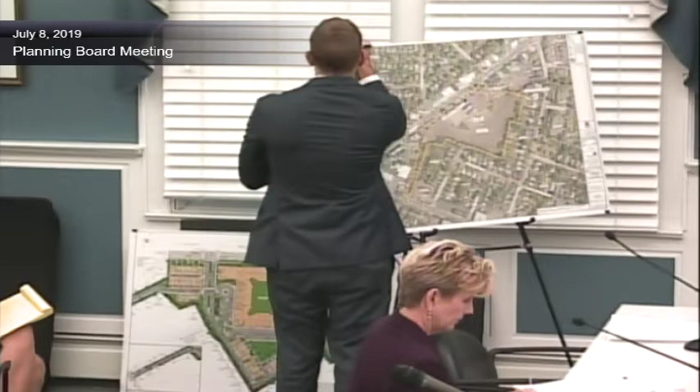Okay, so what I'd like to do for the record, mark this first exhibit A1. It is a plan titled Aerial Exhibit. It's been prepared by my office with today's date of July 8, 2019.

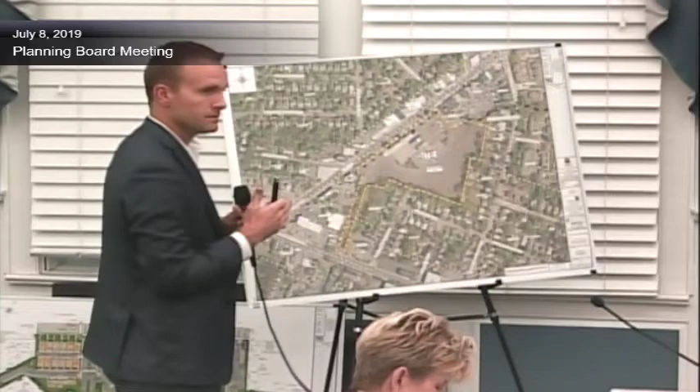Before I get into the proposed site improvements, I want to quickly familiarize the board with the subject site for our application. For the board's reference, the top of this exhibit is to the north. The subject site for our application is delineated with a thick yellow dashed line, part of the redevelopment plan centered on this exhibit.

Mr. Carter, maybe you could turn it to the public so they can also see it? Yeah, it's also on the TV. Can we turn the TV a little bit? No? Okay, just turn the exhibit. I don't know if any of the board can see it. Good, because I think the board should see this. We'll be okay, we have it in front of us.

So with regard to the overall site, it's about 9.7 acres. As you heard from Attorney Price, the first 20-foot strip is actually located in the township of Millburn along the Millburn Avenue frontage. The subject site to the north has frontage along Millburn Avenue, which as you heard is under Essex County jurisdiction as County Route 527. Immediately beyond that are various retail commercial uses that lie within the township of Millburn.

Working in a clockwise direction from that point, one specific area I want to call attention to, and I'll talk more about it in the proposed condition, is that the northeast corner of the site is Van Winkle's Brook, an NJDEP regulated watercourse. Currently, impacted by the existing site conditions, you have asphalt parking areas from the prior use that encroach within that riparian corridor of the stream. So when I get into the proposed conditions, you'll see one of our redevelopment goals is restoration to that riparian corridor, pulling back that impervious cover that's almost right to the top of those stream banks.

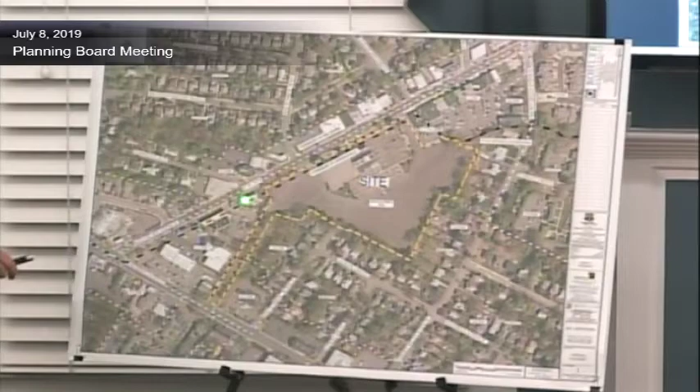Santander Bank is located along the western portion of our frontage. If we focus in on the existing site a little bit more, I indicated it was 9.7 acres, former home to the Saks Fifth Avenue department store.

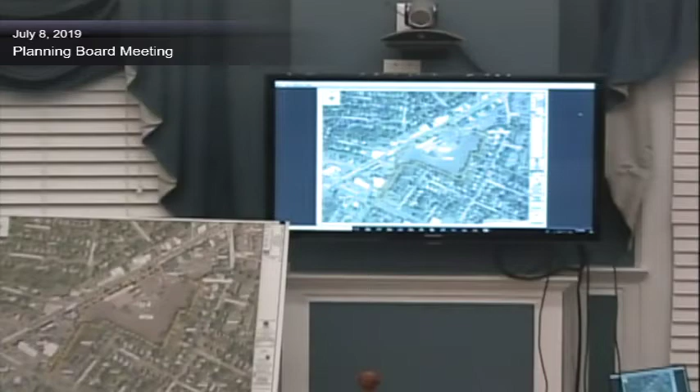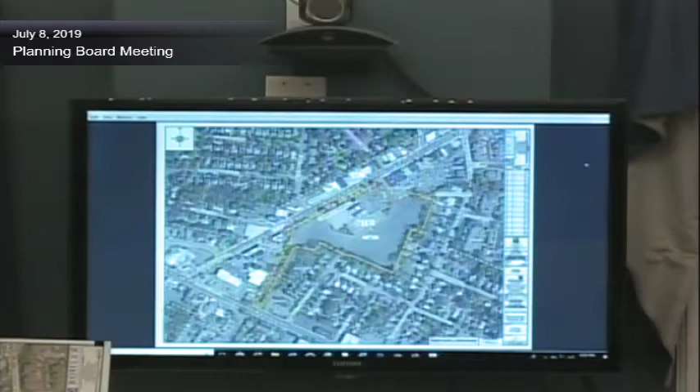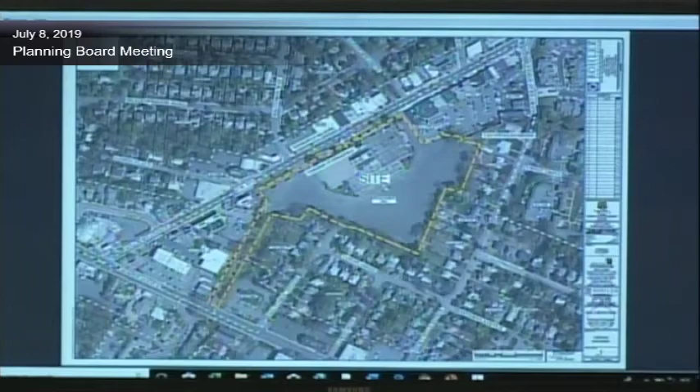That building is located about 28 feet from the Millburn Avenue right-of-way. Factoring in the first 20 feet that are in Millburn, it's roughly 8 feet into the Township of Springfield area. That structure itself is about 83,000 square feet. Rough height of that building is 20 feet, but as several board members may know, some of the central portions of that building actually extend a lot higher, getting all the way up to about 41 feet.

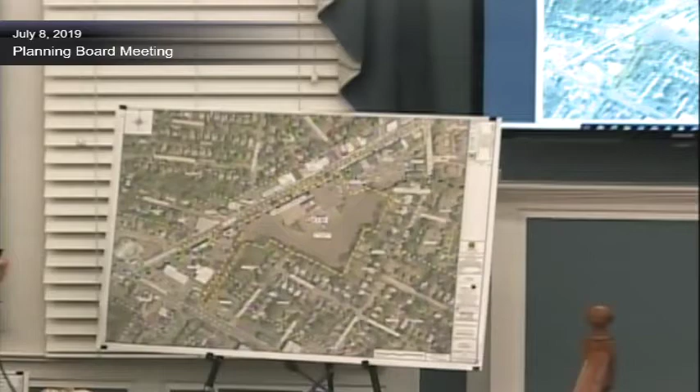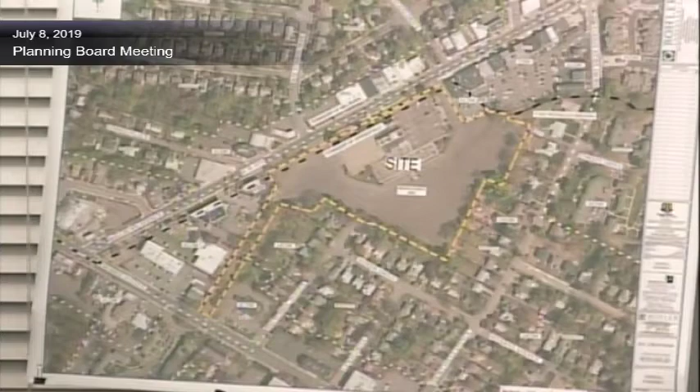One thing that the aerial accurately presents is the expansive impervious coverage on this site. Behind that existing building there are expansive asphalt parking fields, on the order of 84% of the overall site being impervious coverage. As I get into the proposed conditions, you'll see one of the improvements to the site is a significant reduction in impervious coverage, added green space, added landscaping, and amplified landscaping buffers to the residential properties to the south and east. Under current conditions, some of those parking fields actually get as close as 1 to 2 feet from that shared property line to some of those rear residential uses.

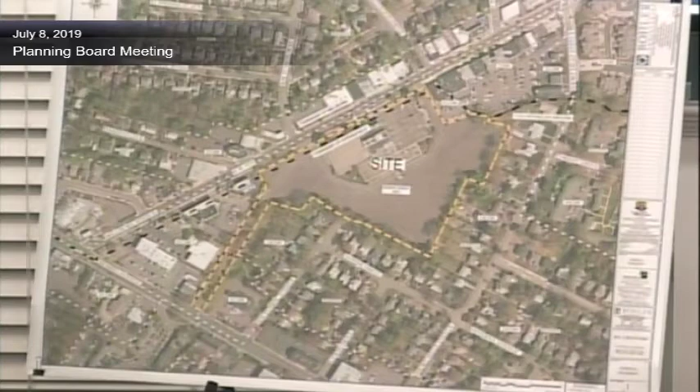Anyone have any questions on existing conditions? Otherwise, I'm going to go right into some of the proposed improvements. Go ahead.

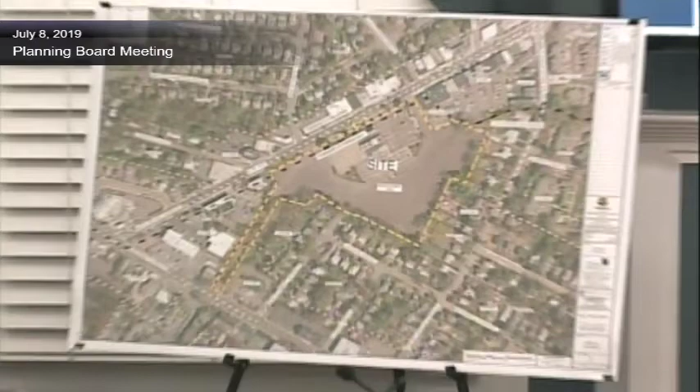Mark this as A2. Yes, so I'll mark for the record A2. This is a site layout plan exhibit, also dated with today's date of July 8th, 2019.

This plan sheet may look somewhat familiar. It's actually a colorized version of sheet 5 of 22 within our site plan document set. It's colorized, and I've also overlaid the proposed landscaping improvements onto this plan so you get a bird's eye view, two-dimensionally, of the build-out of the proposed redevelopment area. I also added a small inset in the bottom left-hand corner of this exhibit that continues to show the Morris Avenue connector road that extends out from the development as an access point.

Very similar to the aerial, this is also for presentation purposes. The top of the exhibit will be to the north. I've taken a slight rotation from the aerial, but for purposes of describing the site, we'll say that the top of the exhibit, or the Millburn Avenue frontage, is to the north.

As Attorney Price had indicated, our mixed-use development is comprised of 270 units. 223 of those units are located within a 4-story multifamily residential building. The balance of those units, 47 townhouses, are located in townhouse clusters varying anywhere from 3 to 6 units at the northwestern portion of the site and along the southern and eastern portions of the development.

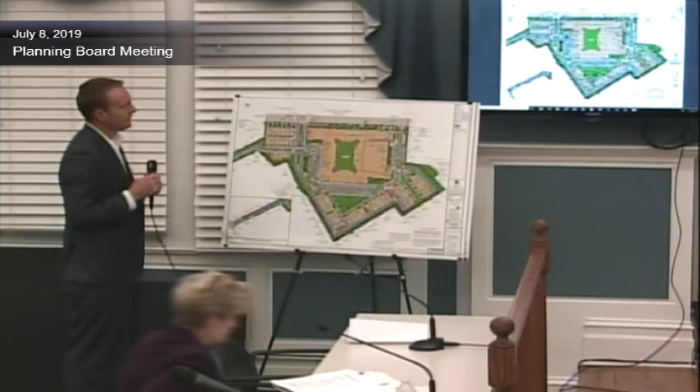We're proposing 2 access points from Millburn Avenue in the proposed condition. Our easternmost driveway is a full movement, non-signalized, and our primary access point, the western driveway, is a proposed full movement signalized intersection, to be designed and under review by Essex County. Our approach to that traffic signal takes on a boulevard-style approach, with an ingress lane separated by a landscape divider from the egress lane immediately opposite to that.

The additional access point that exists today, but also to be improved with our application, continues to provide that connector road out to Morris Avenue, which is under state jurisdiction. One thing I'll note about that access point is it is reserved for residents only.

So what we've implemented is a gate mechanism. A resident with their key card or key fob will be able to swipe it at one of the kiosks or gate stations to allow access for residents only. That's not intended to be any type of public cut-through, it's specific for the residents. Reviewing some comments we received from the fire department, we can certainly work with that gate either through a radio frequency or access code that would allow emergency vehicles, fire trucks, and responders to also use that access point if they had to get into the site.

Specifically, a little bit more with regard to internal road networks. I talked about the western driveway and the eastern driveway. Tentatively, as it's named on our plans, Metropolitan Way can be described as the primary road that works in a clockwise manner from the western access point to the eastern access point.

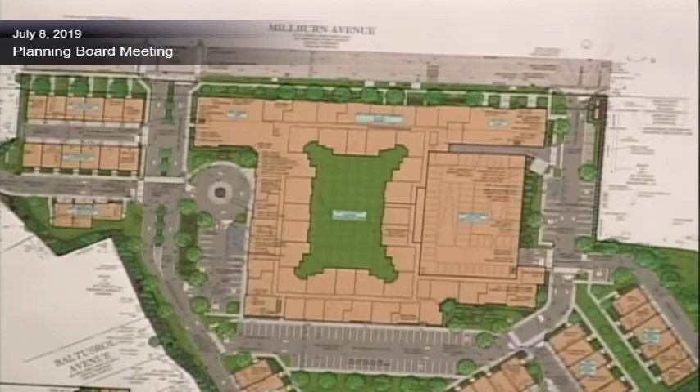You'll see here multiple access points and doors that have been designed if that space were to split up into multiple tenants. So whether it's one user or multiple tenants, from a civil engineering perspective, if demise walls were put in based on how it was leased at a future date, you could provide multiple access points for that ground floor retail.

As it relates to parking, and that's why I briefly described the retail, based on our proposal of 270 units with the mix that you'll hear from our architect, as well as the 5,215 square foot retail area, we're required to have 390 parking spaces. As proposed in what you see in front of you this evening, 516 parking spaces.

A lot of those will be provided in the associated parking garage, which you'll see some elevation shortly on from our architect. 320 spaces in that garage, specific to residents only. They are assigned spaces, and you'll hear some additional testimony that access into that garage will also be access controlled for regulating the in and out of those residents.

From there, each townhouse was also required to provide 2 spaces per unit. As I had indicated, each townhouse has the ability for a 2-car garage. Most of those units are rear-loaded in that condition.

And then the balance of the parking provided around the west, south, and eastern portion of the development, 102 surface parking spaces. In close proximity to the retail component, which required parking of 1 space per 300 square feet, or 18 spaces, we're providing 19 in that close proximity to the ground floor retail at that northeast corner of the building.

As it relates to stormwater management for the subject site, under existing conditions, I talked a lot about the impervious coverage, the 84% on the subject site. We are considered a major development as it relates to DEP and township stormwater criteria. However, predominantly as a function of reducing impervious coverage, we're able to satisfy those stormwater management regulations.

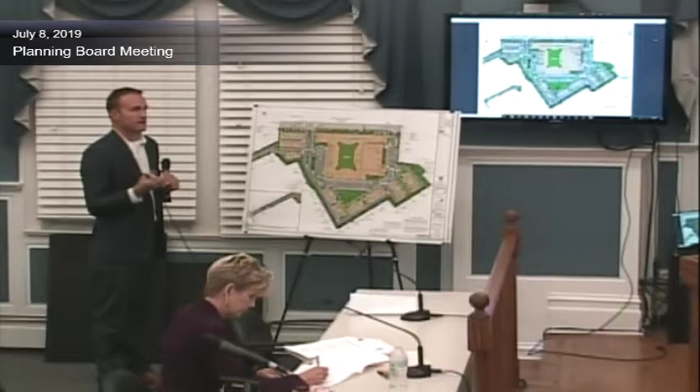With regard to lighting, we did prepare a fully compliant LED lighting plan with our submission set. When I say fully compliant, that adhered to several of the design standards within the redevelopment plan, as well as various underlying code sections of your ordinance. Of particular interest is the maximum mounting height of those LED fixtures, which was restricted at 18 feet.

So along Metropolitan Way and through some of these various surface parking areas, we're providing the post-top LED lights at that 18 feet. When you get into some of the other areas, particularly some of the small alleyways for the garage access to the townhouse units, those lights actually come down to more of a residential type feel. They're 12 feet in that area.

Also, with regard to lighting, the redevelopment plan had a strict requirement. There was to be no light trespass to adjacent residential properties to the east and to the south of the development.

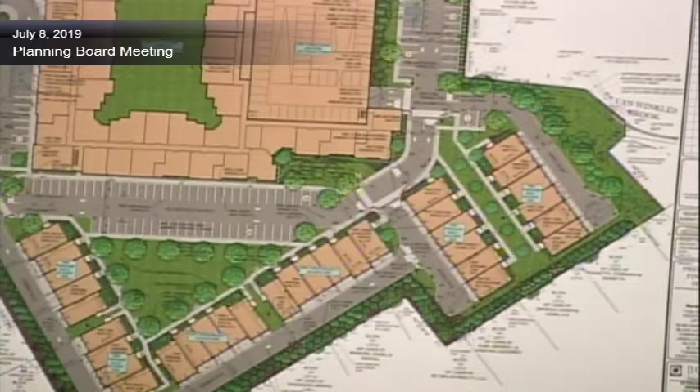Based on our design and modeling, no light trespass is anticipated, and we're in full conformance with that stipulation for light trespass at residential property lines.

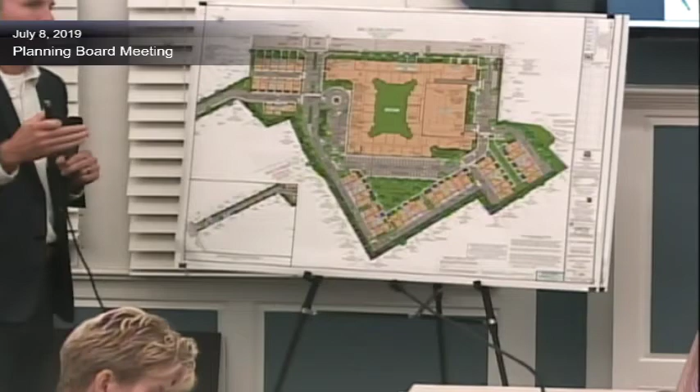As it relates to the landscaping improvements on the site, I talked about the added green space on the property. Also, under existing conditions, I mentioned at the northeast corner Van Winkle's Brook, and the impairment that stream corridor had from the impervious coverage of the prior parking fields. As the rendering suggests, we're pulling that asphalt back and restoring that riparian corridor. It does require some minor DEP permits that we're in the process of securing, but it's a great added benefit for restoring the integrity of that stream watercourse.

In addition, and in preparing a fully compliant landscaping plan, additional street trees and streetscape improvements are provided along that strip of land along the Millburn Avenue frontage, with street trees spaced at 50 feet on center maximum. Additional shade trees are located within the parking fields throughout the balance of the site.

Another redevelopment plan criteria - on the southern end of the site, a triangular area - requires us to provide a 12,000 square foot minimum central green. This serves as another open amenity for residents, an area for enjoyment with open lawn space. We've also included sidewalks, benches, and trash receptacles so it can be enjoyed.

All in all, the landscaping plan as a whole introduces over 3,451 new plantings to this site, including over 501 new trees, much of which is provided as part of the minimum required landscaping buffer to the residential uses to the east and south. I mentioned that under existing conditions, impervious coverage was as close as 1 to 2 feet in several areas; we're pulling that back to provide a minimum of 20 feet of dense evergreen plantings.

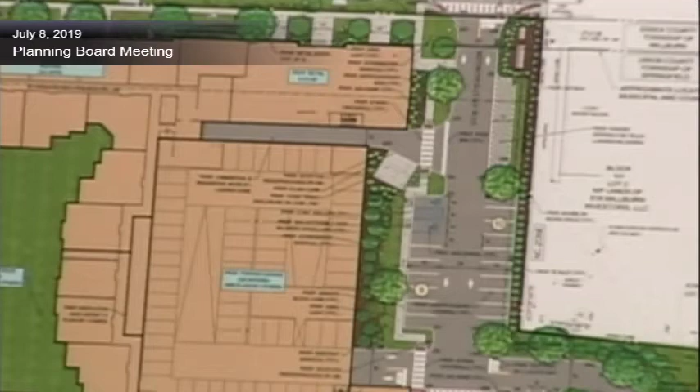As it relates to trash and recycling collection, I'll split the development into three components: retail, townhouses, and multifamily. For townhouses, the lease management office will provide each unit with 1 to 2 receptacles for trash and recycling, required to be kept within their garage and wheeled out on collection days. We anticipate a private hauler will collect these on a set frequency within the development.

For the multifamily component, it's a little... what's the right word?

There's a process to it. If you're on one of the upper floors, there's internal trash chutes that lead the trash and recycling materials down to a common refuse area. In that area, some of the larger containers actually get rolled out.

We'll utilize the 12-foot wide alley for garbage and recycling collection at preset times. The last component is the retail, the 5,215 square foot retail space. We've provided a 10-foot by 20-foot trash enclosure to handle waste generated from those retail users, and we've designated a 12 by 50 loading space for anticipated box truck deliveries servicing those retail uses. We provided box truck templates as part of our site plan to show those trucks can adequately maneuver through the site.

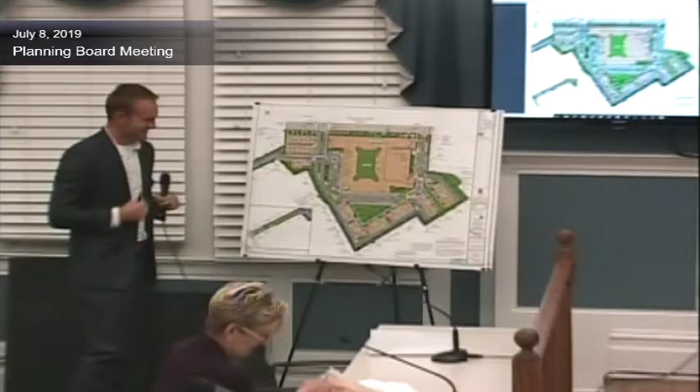That's all of your direct. Let me ask you a couple of questions. On your last statement, that eliminates the potential for a waiver, correct, by changing the chain link material?

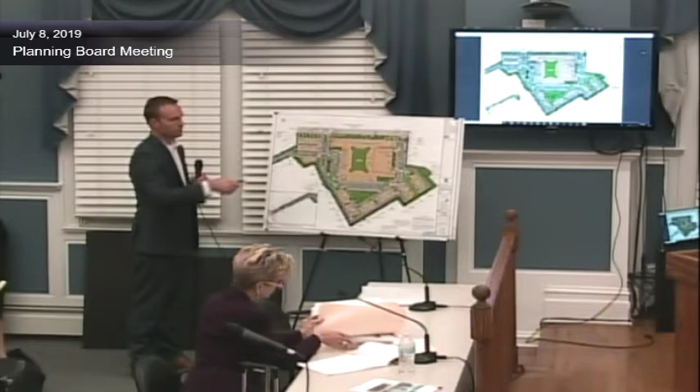That's correct. With regard to outside agency approvals for this development, you referenced a few. I want to confirm, because a couple have already been submitted. It's my understanding that Union County approval is necessary together with Soil Conservation, DEP, and perhaps DOT, is that correct? That's correct. We have to get an E&S approval from Somerset Union County. They coordinated with Hudson Essex Passaic Soil Conservation District, and they decided Somerset Union would review the soil erosion sediment control plan for the subject site, even though it's a split county here. Also, more or less as formality, permits for improving the Van Winkles Brook - we have to secure an NJDEP FHA verification and IP for removing that footprint of disturbance within the riparian corridor.

We'll just condition it, if the board acts favorably, on all outside agencies. Correct. Because you'll need safe drinking water approval, you'll need to work with our new ordinance for Rahway Valley Sewerage Authority, all that stuff too, so we'll work with the engineer.

So do you have anything further? I want our engineers to talk before the board opens up. No? Mr. Disco, do you want to take the board through some of your comments, some of which were addressed, and ask them questions before we open it up, because you may be able to resolve them. Or were you waiting for all of them to get done and then go back? No, we're going to our professionals, then coming back. You changed it. No, I didn't. Okay, go ahead, Mr. Disco.

I'm going to skip what I think the architect will get. Your attorney, Ms. Price, addressed comment number 1. Comment number 2, the heights of the trees adjacent to the garage lower level for screening purposes. Yes, approximately 10 to 12 feet at install for those trees.

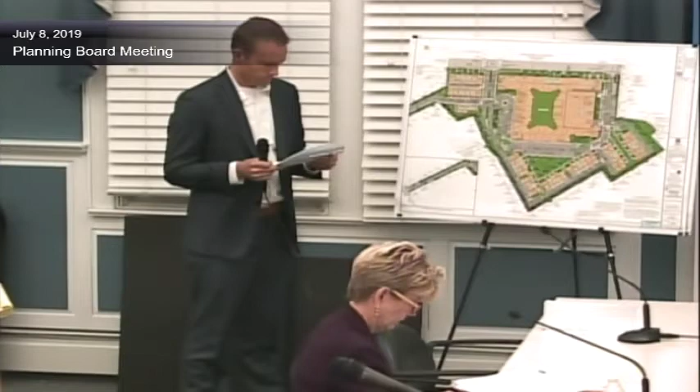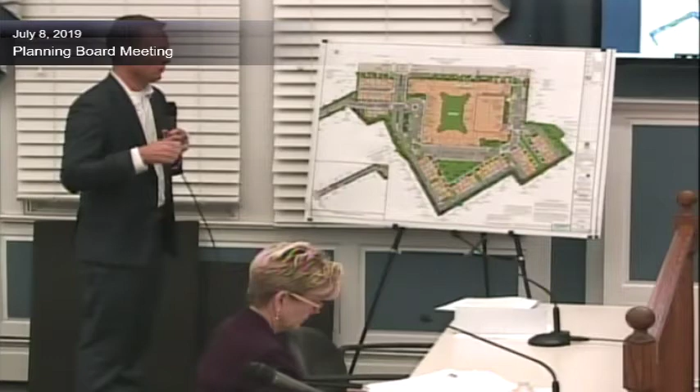I would defer to comment number 5 in terms of any traffic calming measures on lot 34, if you want to discuss what you already have in that regard. Yeah, no additional measures are proposed. I had indicated that access from Morris Avenue is restricted to residents only through a gated access point that is key swiped, key coded on either end for residents only. As you ingress into the site in a northerly direction, there's a small S-curve, which I believe will also serve as a traffic calming measure as you further enter into the primary intersection coming in off of the Millburn Avenue signal. The reason I bring that up is the redevelopment plan allows the planning board to consider traffic calming measures on that driveway. I do not recommend any more at this time.

I'll wait on comment 6. Seven.

Is comment 8 probably more geared to the architect? That's correct. And comment 9 would be the architect. I think you covered most of number 10.

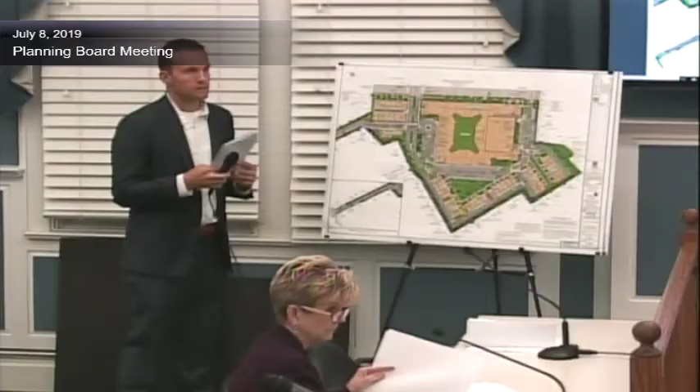I'll ask you one question. Just make sure you reviewed the landscaping plan, where we put the word significant landscaping, does this buffer the residents? One question I had was the height of the tree species in that 20-foot buffer. Those trees will vary, but generally 6 to 8 feet at install through that 20-foot screen.

So you have a 6-foot tall fence, and at installation, a 6 to 8 foot height on, I believe, 3 of the 4 evergreen species? Correct. And the 4th evergreen species was 8 to 10? Yeah, 8 to 10. So you're going to have 6 to 10 foot tall evergreens at installation. What is the average growth rate of those species? I asked our landscape architects, and they said to anticipate growth of about 1 to 2 feet per year per tree. I think that's a pretty significant buffer. It's fully evergreen along the southeast, southern, and southwest borders, and the western border against all residential.

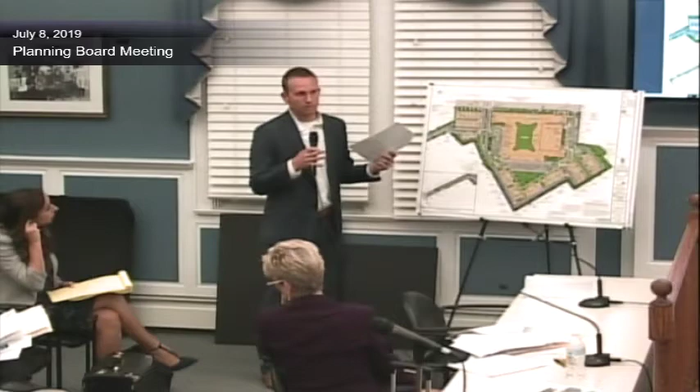What's important for us is making sure that structure is outside of the sight triangle at that intersection, and we have supplemented with some additional plantings, but per the utility provider requirements, we are required to put that within a certain distance from the main located in Millburn Avenue.

That's what I was going to ask, if you could move that back, or is that the maximum depth you can go? If we have the opportunity, we could potentially move it to the other side or to the southern end of that 12 by 50 loading area, subject to New Jersey American Water's approval. We've had some success in asking for a slightly longer distance.

Okay, 16 just piggybacked some of the fire comments. In general, you saw the fire department's review letter? I did, yes. There was probably about 10 things on that. Did you have an issue with any of those? We did not, and particularly as referenced here for 16 with the mountable islands, we're agreeable to that with the granite block that's mountable at a 45 degree.

17 was really a request, more of a practicality issue in that there will be some time for this project to occur. I don't want to presume what it is, but I would assume at least 12 months, if not more. So there may be a possibility to put the landscaping in early on.

I think the board would defer to you to come up with the right thing based upon the timing of construction. It's really an acquiescence question, if you're not opposed to that. As long as it was sequenced with some of the earlier site clearing and demolition activities, once we're done with demolition in that area, certainly that could be sequenced in with that work.

And that's meant to protect the residents, to give them some additional buffering during the time period of construction, sooner rather than later. It would also allow for the benefit of that additional time for the plantings to grow even taller.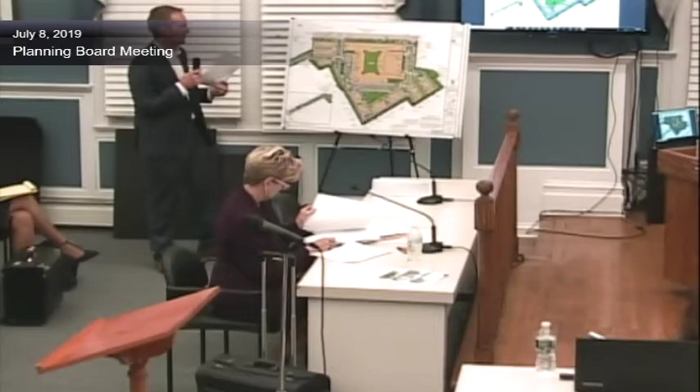There are sanitary sewer comments that I don't know if you will wish to discuss now or later. Yeah, absolutely. So one of the items with regard to utilities on the site is some board members may be familiar that there's an 8-inch sanitary sewer main that bisects the site from a west to east direction. As part of our improvements, working around the future parking areas, drive aisles, and building placement locations, we are slightly relocating that main and associated easement to the Township of Springfield for that sanitary sewer improvement.

Certainly with our development, there will be an increase in flow, factoring in also that there is some credit that comes back with the existing building that's there. We've agreed, in review of this comment, that there are some I&I issues within the township sewer system, so we will coordinate a small inspection of a certain section of pipe that may be contributing to those problems, and work either a contribution or an improvement that's prorated on the added flow from the sanitary sewer generated by this redevelopment.

Okay, I had 3 comments regarding sanitary sewers. The project, as indicated by the applicant, is a benefit from a stormwater perspective, meaning people downstream are going to get less runoff. From a sanitary sewer perspective, though, from a vacant property and a previously developed retail property, we're going to have more sanitary flow. Makes sense.

So there are 3 components we have to address. Number 1, does the receiving sewer have capacity? I believe it does. I've asked Bohler Engineering to provide a capacity analysis. I believe you consent to do that.

Correct. The second issue is that Public Works has identified that where the sanitary sewage from this site goes to the south and southeast, there is an area of impeded maintenance problems on Denham Road. So we want to protect against exacerbating that situation. So what we've asked for is some agreement to have them investigate that area, to inspect it, to see if there are identifiable problems that can be corrected.

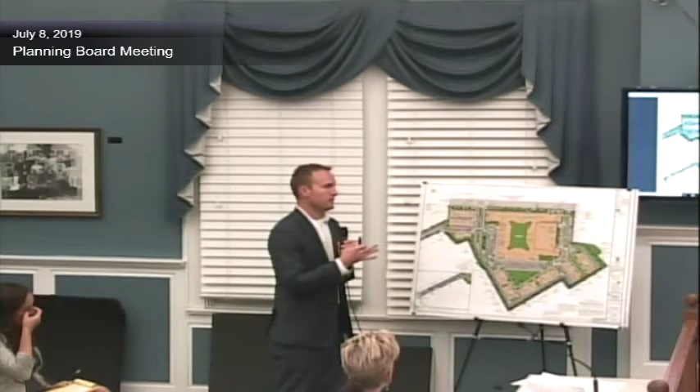Certainly. The highlighting point is the introduction of all the additional green space as you had highlighted. One area that was very important to us, especially in light of the state-regulated watercourse of Van Winkle's Brook, is how we can improve that riparian corridor by restabilizing those banks, adding green space that serves not only this property but also downstream and upstream of Van Winkle's Brook.

We added a lot of landscaping, but one non-structural feature we introduced is a rain garden. On Exhibit A2, it's located at the western portion of the building, where you'll see expansive landscape areas. Designing it as a rain garden allows pavement runoff to go through a curb break into this garden, which serves as irrigation and a water source for the plantings, instead of conveying it structurally through storm pipes and structures. It's an added amenity with visual aesthetic benefits from the plantings provided there.

Another addition, in speaking with the developer Scott from Garden Homes, is they're looking at introducing electrical car charging stations, as they've done on several of their other developments. For this site, they're potentially looking at adding 2 electrical car charging stations on the exterior, which would be a feature or amenity for someone visiting the site with an electric vehicle.

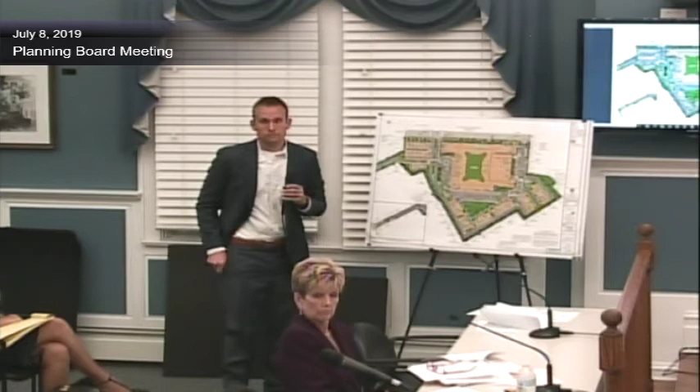Did you use anything further? Nothing else. I would just say with respect to the transition to the residential area, that's something we've always been very focused on with this plan, along with the landscape buffer and screening. I agree with Mike and with Ben - this is what we envisioned. This is the part of the significant work. It's compliant, and it may even be above and beyond. It's going to be a really nice visual screen to the properties to the south.

So with that, I want to open up to the board to ask questions of their engineer and our professionals. Mr. Brendel. The middle space of the apartment building - is that just green space? The architect will actually have some further advanced renderings of that space, but it's intended to have a pool and some hardscape areas as well that serve as an amenity to the residents.

And I know we talked about wastewater, but what about the other way - have you done studies of flow rates for drinking water, is there enough? Yeah, we've done some preliminary flow tests as part of the domestic and fire services through the site. Certainly, we have to obtain approvals from New Jersey American Water for those services and obtain a state permit.

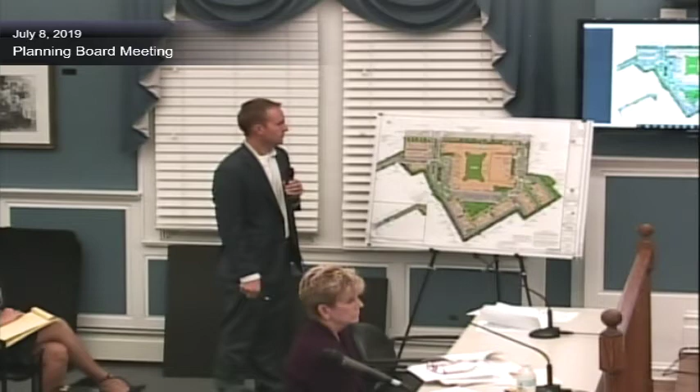Okay, I may or may not have a question, but the witness talked about fire truck access. Did we hear from the fire department? Yes. And they're fine with it? They gave us a letter, I don't know if it was distributed to the board - it was about 10 bullet points.

Did you review this? Yep. Did you agree to everything in this? We don't have any problem with any of the comments from the fire letter. Okay, so just make it a condition of approval if they agree. Then I have no questions. Thank you. Ms. Kessler? I don't have any questions.

Mr. Barnett? I think in 15 years of doing this, that was the best presentation I've seen - thorough, thank you. I don't have any questions. No, I would have answered all questions.

So I have questions on the units, what the design in the units are - that'll be the architect. Excellent witness, thanks. Okay, so if you could stay here, because later when we open up to the public they'll have questions, and we may have some follow-up questions, so he's not going anywhere. Okay, so if you want to call your next witness. Dave?

Mr. Minno, we'll swear you in. Do you swear that the testimony you provide before the board this evening will be the truth? I do. Can you state and spell your last name and provide your business address for the record? My name is David Minno, M-I-N-N-O. I'm a principal in Minno & Wasko, Architects and Planners. We're about an 85-person architecture and planning group based in Lambertville, New Jersey, and also Newark, New Jersey. I've been doing this for about 40 years. I'm a licensed architect and a professional planner in the state of New Jersey, and very excited about this project.

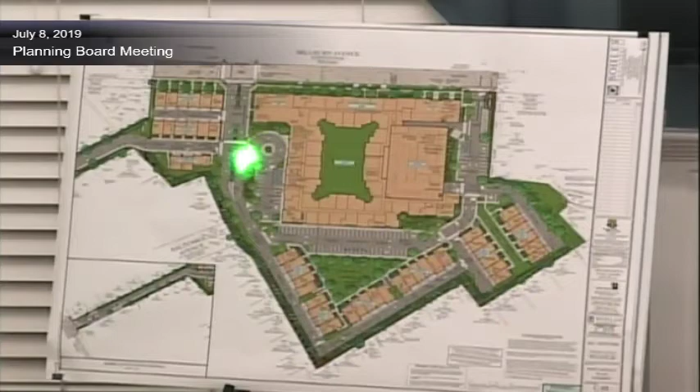Much of the site-related work has been discussed, but it's important to emphasize that this is a lifestyle community. One of the things we look at is when people come to this community, what do they see? If you look on the drawing there, we have this beautiful main entrance off the building, with a great motor court, almost like a European motor court.

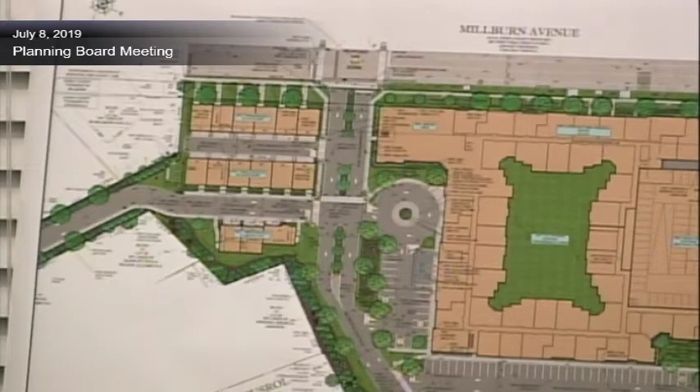The main entrance to the building is in the corner. If you look up on my drawing, the lighter colored area right by the circle, that whole area is amenity to the leasing center. That looks through on the ground floor, back to that center courtyard where we will have tremendous amenities.

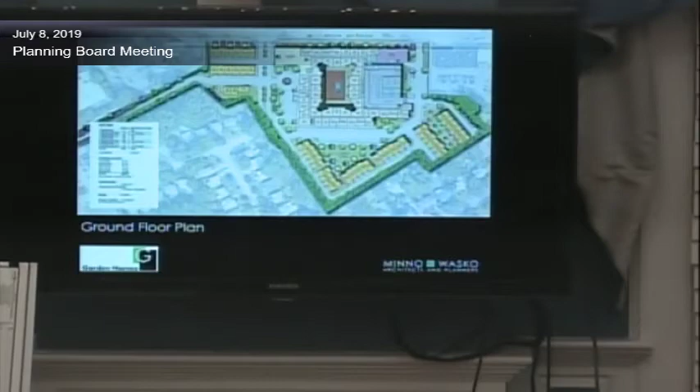We're going to have some hardscape, some green area, and a pool. This is an area where people can come and congregate. There'll be outdoor grilling, and at night there may be fire pits out there, lounge chairs, and it really becomes a very active space. We want to show that off—the minute you walk in the building, you look right out and see that beyond.

The retail is on the upper right-hand corner of the northwestern portion of the site, and we're trying to tie that in with the existing retail on Millburn Avenue. So we're trying to create that synergy, and hopefully we have a really nice wide sidewalk in that location, and hopefully we can do some cafe dining along that section of the street.

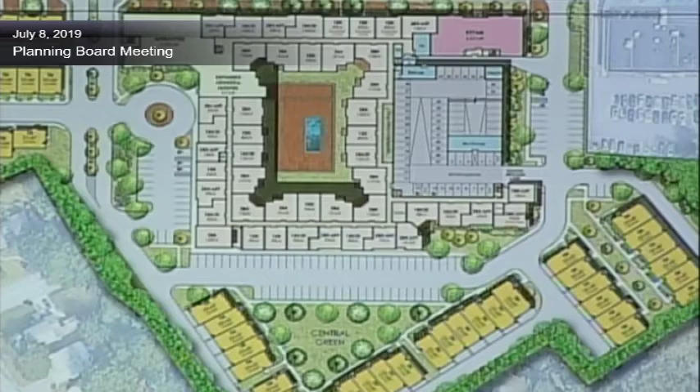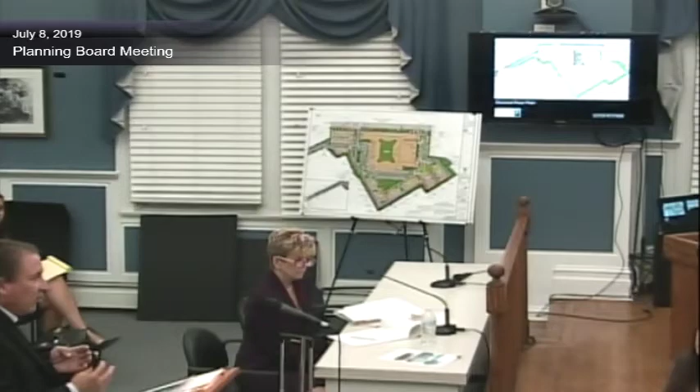This really acts as a traffic calmer in this particular area. We've taken care with the design of the townhomes to not, as the redevelopment plan states, have any garage access or cars backing out of garages on Millburn Avenue. We've alley loaded the garages, which concentrates the cars, putting them out of sight. So the front door area becomes very clean and nice, and doesn't emphasize the automobile like a lot of townhome communities do.

While I'm here, I'd like to go through some of the statistics on the buildings themselves, first talking about the 223 units in the larger multifamily building in the center. This is a 4-story building. We have 119 one-bedrooms, 94 two-bedrooms, and 10 three-bedrooms.

The 3-bedroom units are part of the affordable component. For those who don't know, of the affordable units—the 41 units provided as affordable—we need to provide 20% one-bedrooms, 60% two-bedrooms, and 20% three-bedrooms. That's how we get to those 10 three-bedrooms in this plan. We were asked to do, I think, 2 additional—one extra 3-bedroom.

By the township committee, so we've taken that on. The retail space is approximately 5,215 square feet, and the amenity space within the building, including the courtyard, is over 7,000 square feet of amenity space.

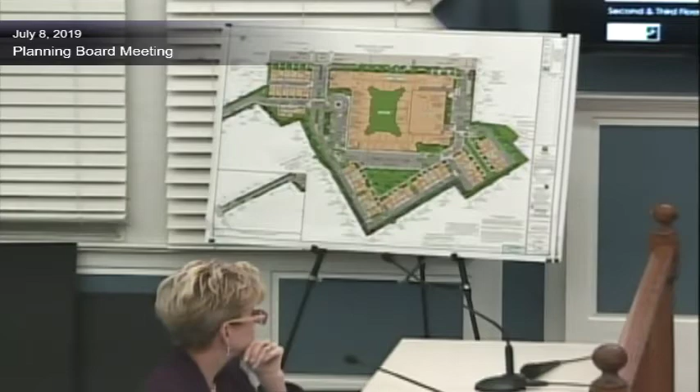Let's move on to the lower level plans. On the ground floor plan, what was amenity space and retail space now begins to become residential unit space above. If you take a look at the garage structure, we've wrapped that garage on 3 sides, and we've done a finished facade on the eastern side of the garage. That's set back from Millburn Avenue, so it's cut off from most view because of the existing retail building on the eastern side of our driveway. So we put it in a very discreet location.

Our vehicular entry to the garage is right here, controlled for residents by a key fob. They hit their key fob as they come down the street, and a very fast operated garage door goes up. They go in, and it's automatic on the way out. That deck serves 320 parking spaces, and it's basically a hidden structure—you won't really see it as you drive by on Millburn Avenue or walk through the community.

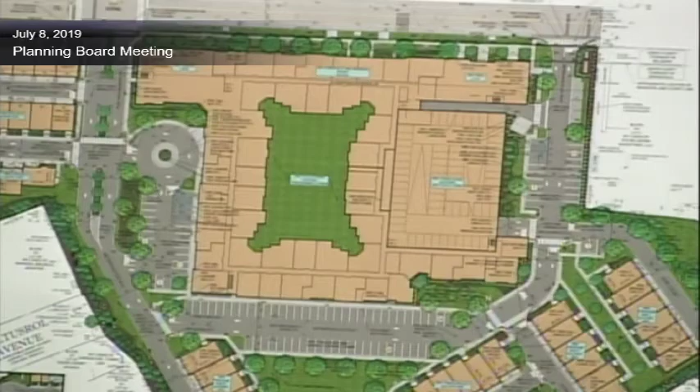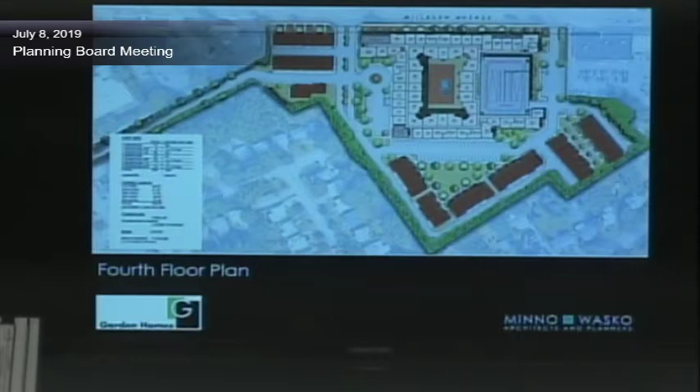Next slide—so we've shown you the second and third floor. The main difference on the fourth floor plan is that the redevelopment plan specified they didn't want constant height of the building along Millburn Avenue in particular. So we varied the height, and you can see some light brown areas along the frontage on the plan on Millburn Avenue where we've dropped the height of the building.

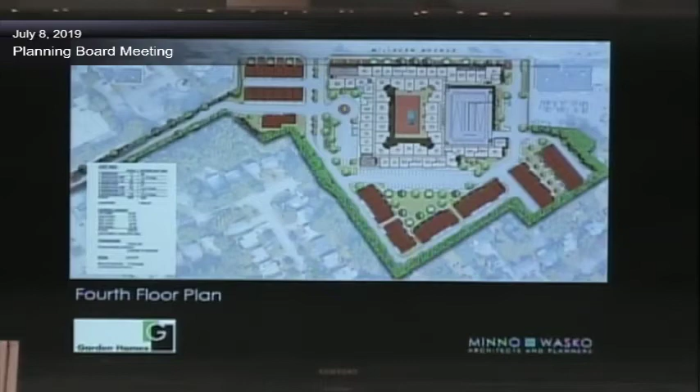One section is near our entryway at the boulevard, and another section is over the retail area. And in the back corner, in the southwest corner of the building, we've also dropped that too, to be consistent all the way around the building. So you'll see when I show you the renderings, we've got a beautiful up and down fascia line, which I think really adds a richness to the building. It looks like they've been built in pieces rather than monolithically.

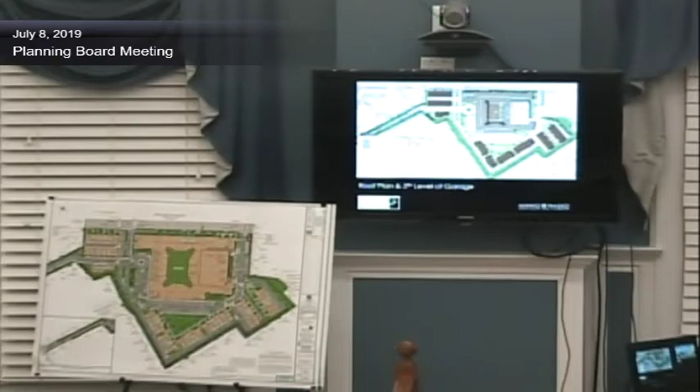So this is the roof plan. This shows the top level of the garage, but it also shows the roof. Down the center of the roof you see some white strips. Those are the areas where we're going to locate the air conditioning for the units. They're centered over the corridor line of the building below to reduce vibration. Being in the center of the roof, they also reduce visibility from anybody on the street level or our neighbors close by. We have a parapet on our building, which I'll show you, that's a little above the roof line. Also, because those air conditioning units are set back, they won't be visible to people in the area.

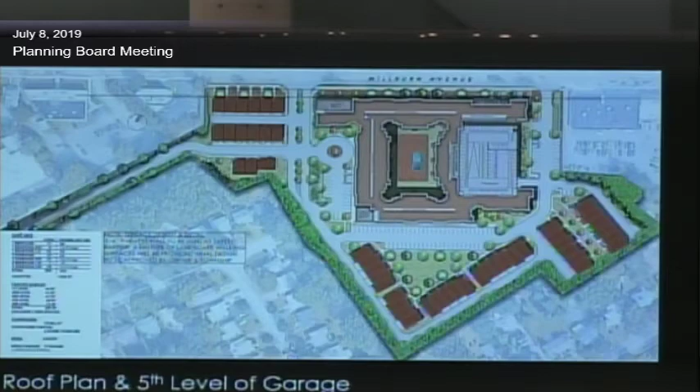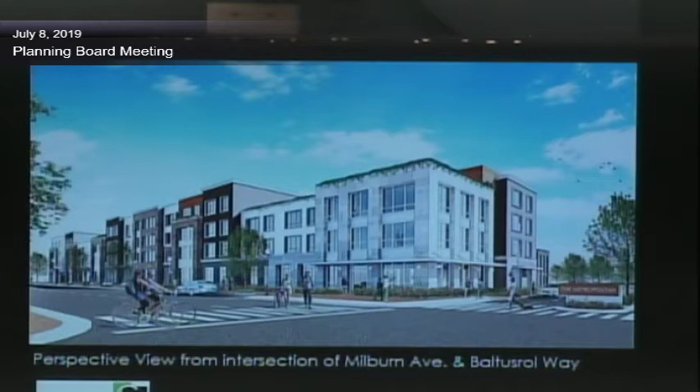So now we get to show you some pretty pictures. This is the view looking from Millburn Avenue, looking to the southeast. And this shows our main boulevard and entry, with the signage on the right-hand side.

I'm going to interrupt you for one second. When you're giving some testimony, can you talk about the materials you're going to be using?

In fact, I have a material board. We do have a variety of materials. We're using a combination of brick, we have a concrete siding material, we have some impregnated wood material, and a lot of beautiful glass within the building itself. And in some cases we have some metal panel on the building, and also some overhangs and entry structures that are made out of metal.

Part of the agreement is also that the planner and the engineer have to approve all materials. We listed them on the elevation and showed you where they are. But I'm also bringing the panel here with the actual materials, which will make up part of the record. I just want people to realize that.

This is also the corner where the proposed traffic light is, even though it's not shown in the rendering. So one of the things I wanted to show here was the varied roof height at this corner. The building is 3 stories, and then as you go a little further down the block it's 4, and then as you see over the retail area in the distance on the far left, we drop down again to 3 stories.

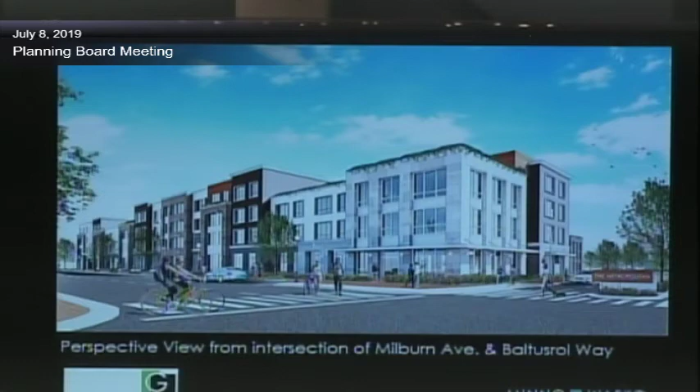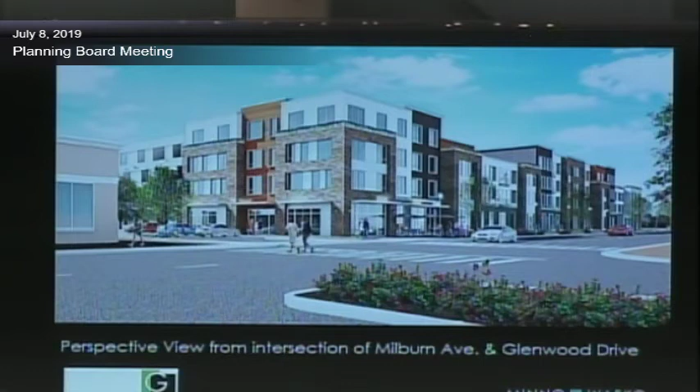This is a view looking the other direction, to the west on Millburn Avenue at Glenwood Drive. You can see on the very left of the drawing there's the existing off-site retail on Millburn Avenue, and you see our retail space. We're showing some cafe dining at the street level, and you see that part of the building has been dropped along the street frontage to 3 stories over the retail.

A little bit more divided light feel to the residential units, but we've done what I think is an easy contemporary type of look. It's a transitional look, which we think people are looking for today. People are really educated these days in terms of design. They visit the best boutique hotels all over the world, they watch design shows, and we feel like they're looking for an aesthetic that's comfortable today but also has a lasting value to it.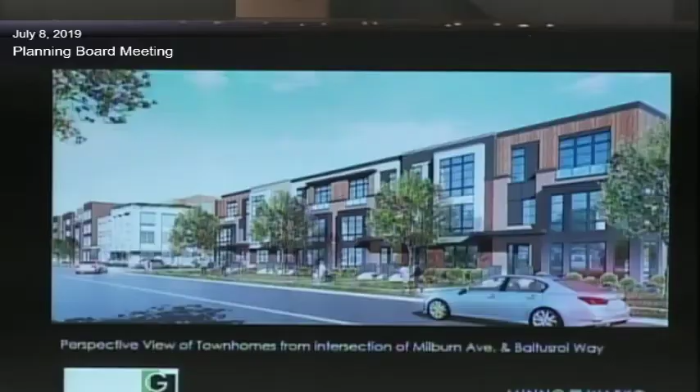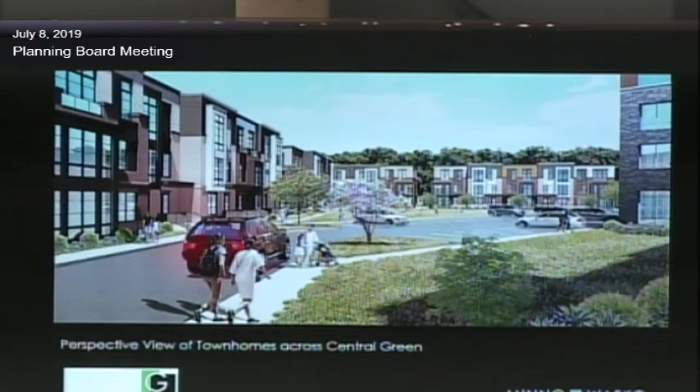This is internal to the site. This view would be taken if you look at the site plan here, if you're at this point looking down into the green of the townhomes. So you're seeing one line of townhomes on the left side of the drawing, and then the townhomes here at the end with the green in the foreground. On the very right-hand corner, you're seeing the corner of the 4-story residential building to your right in this drawing.

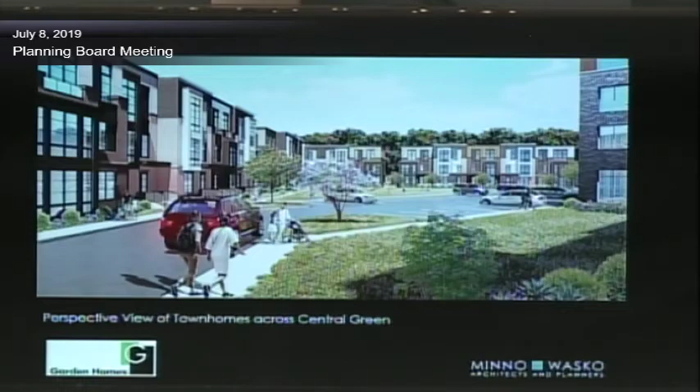So you're seeing the comfortable fit between the townhome architecture and the multifamily architecture. And even internal to the project, other than some surface parking here in the middle, some of which will be devoted to visitor parking, you're not really overwhelmed by the automobile like you are in most residential communities.

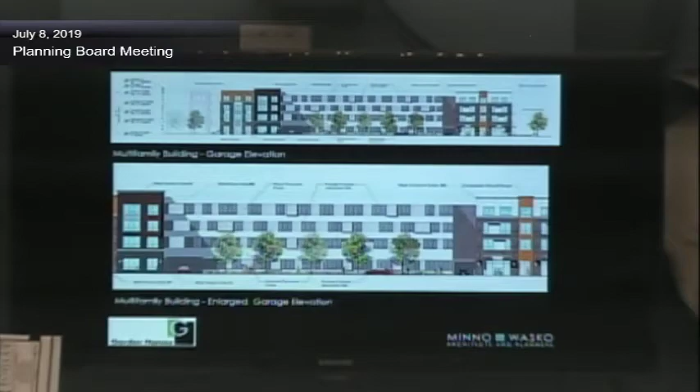I wanted to show people, I know there was some interest in some of the professional review letters of the materials for the garage facade. We've shown a little bit of an enlarged drawing. This is a facade that probably no one will see at this angle. It's taken from the retail property next door, looking at the side elevation. But we wanted to be clear about what we're doing. We're using actual grates that look like windows, but they're open air. We're trying to get the ventilation value out of the open air nature of the garage. They're scaled to look like windows and have mullion designs that look like windows, so it has that residential scale to it. And then we're using a couple of different tones of concrete on the main panels of the building.

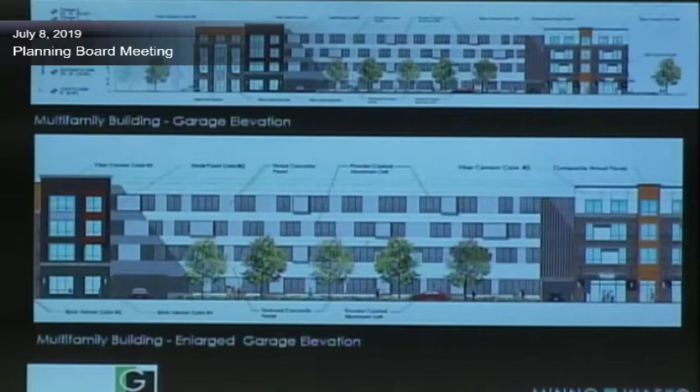Just to be a little more clear, from this point here to this point here—is the microphone on? Mr. Minno, can you grab a microphone so we can get you over there?

This is actually the loading area here to the right, that loading alley that goes behind the retail back to the move-in area and trash collection area. And then this is the main garage door entry into the garage. Sorry, I can't point at that screen.

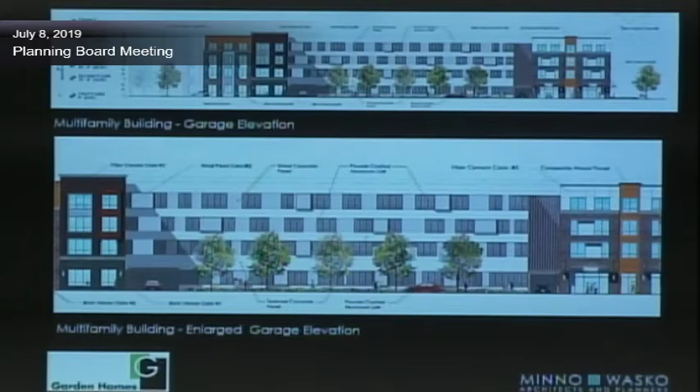If you look at comment 1 on the second page—sorry, I'm going to interrupt you one more time. Do you mind trying to move that mic closer? Because people at home watching the live streaming won't be able to hear you.

Okay, turning to comment 1 on page 2 of this memo. We talked about it in the redevelopment plan, a maximum of a 4-foot high parapet. We showed on our drawings 5 feet, so we're going to modify that back down to 4 feet. I just want to verify that our building height for the taller multifamily buildings is compliant at a height of 48 feet. And we're well below, just as a point of interest, the redevelopment plan height ordinance for townhomes. I believe the ordinance permits 42 feet, and I think we're approximately 33 feet 6 inches. That's one of the benefits of going to a more flat roof or contemporary roof townhome product, as we reduce the height.

In terms of item number 2 on the memo, there was a question about the step back for the roof terrace. We confirmed that we will make that 15 feet. We will be compliant with that. We were slightly less than the 15 feet, but we have adjusted that, and that will be compliant.

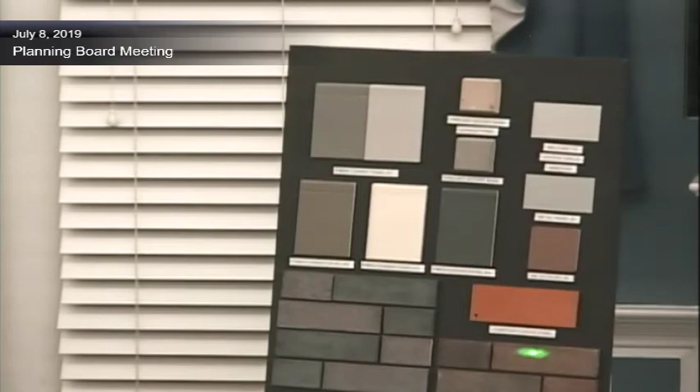What was shown on the material board are the main materials within the building. On the plans, when you look at our elevations in the plan set, they have a couple of different brick colors, brick 1 and brick 2, and we're showing a field of brick 1 and brick 2 here. We've got fiber cement panels, 5 different colors used - 1, 2, 3, 4, 5, there's various colors of fiber cement board used throughout the project.

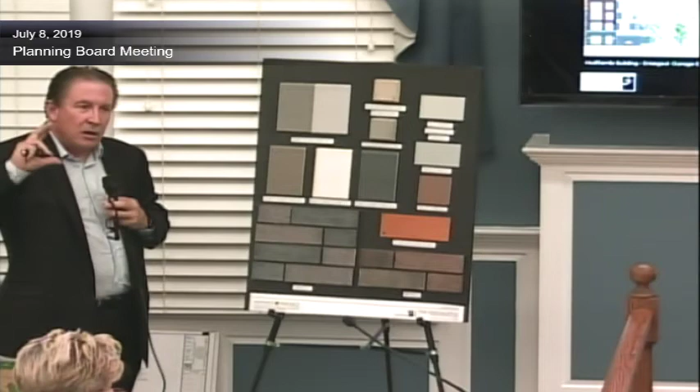Many people know this material in residential settings as Hardie board, that's a trade name, but what it is, it's a painted concrete material. This is concrete through and through, it's a very safe material, very long lasting. We're using it mostly as larger sheets with reveal lines, meaning we have a very nice joint between panels rather than a batten panel over the joints. So we're doing a more refined look of this Hardie panel, and it gives us the ability to vary color throughout the building.

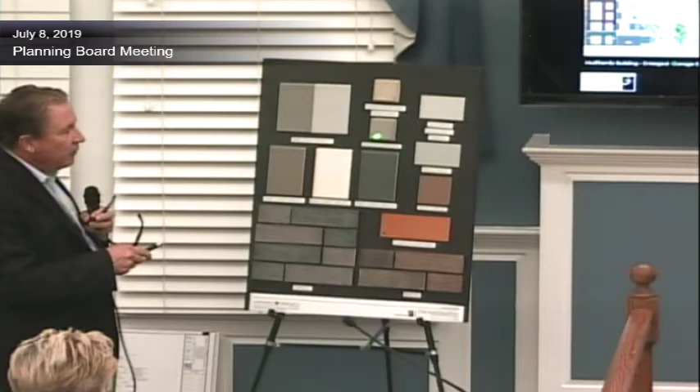Metal panel — we're showing 2 different colors, a gray and a brown panel, and these are used as accents throughout the building. We have precast accent panels particularly along the streetscape in low areas like water tables. We've got 2 different colors of precast concrete. And then the balconette, garage grills and windows — we're talking about a silver tinted metal window.

The last one is the wood panel. This is a composite wood panel. I think you saw some of this on the multifamily building on Milburn Avenue, and also on the townhomes. We've used it as accents. So these are the basic palette of materials that we'll be using throughout the building.

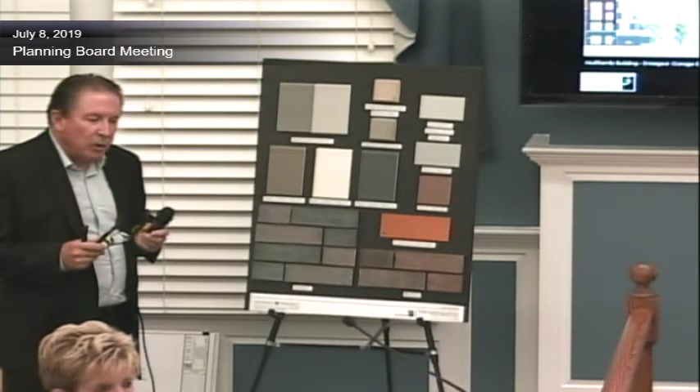Okay, anything further? Nope. Keenan and Mike? Mike, you want to go first? Well Keenan, you go first. Well, since it's your— just while we're on materials, I had a question about the material above the loading space for move in, move out activity. What is that material, the vertical paneling system there?

Dave, use the microphone. That's the composite wood panel. Okay, composite wood panel. Got it, okay. Keenan, do you want to take questions?

Otherwise, all of my comments in the letter have been addressed through the architectural testimony. I will say, just in general, it's a pleasure that we're reviewing architectural plans that are consistent with the plans that we've been seeing for many, many months at this point. So there hasn't been any change in materials, or even the rendered views that we have in the redevelopment plan are essentially the same ones they're presenting tonight. So that's all positive, and other than that I don't have any open items on the architecture.

Mr. Disco, before I open up to the board — are we retaining that materials board? Yes, it's yours now. You're retaining it. Has it been identified as A4? Yes, it's marked as A4.

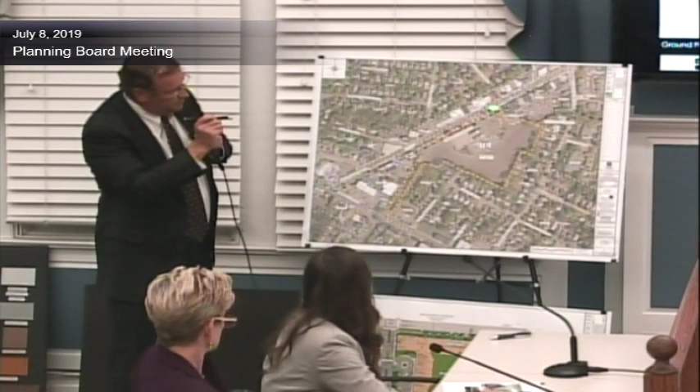So this is a good exhibit, it shows all the streets. My thing's dead, but Baltusrol Way in Milburn. Oh, thank you. Mr. Trauma, you're using Exhibit A1, correct, for the record? So Baltusrol Way in Milburn comes, and that would be the four-way traffic signal. And then Glenwood comes out from Milburn here, and this would be the stop-controlled driveway allowing all turning movements. And then the third...